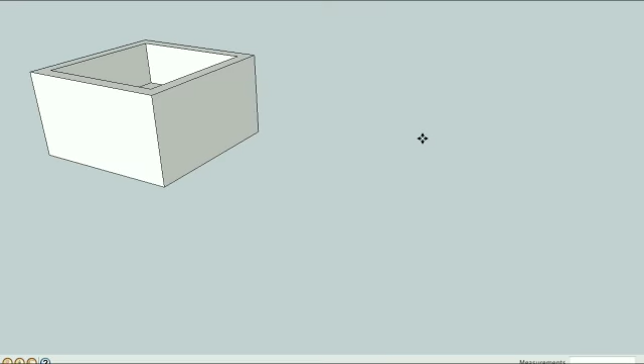So I've had a few requests to show some different joints, like a miter joint, half lap, dovetails. So I thought I'd take a tutorial here just to do a bunch of different joints. Let's see what we can do. We'll learn a new tool or two here as well.

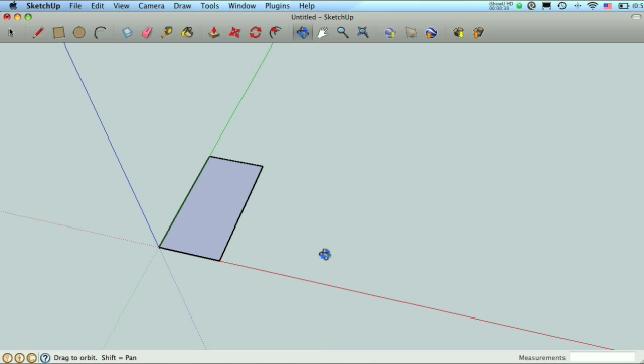So let's do a miter. It's a pretty simple one that a lot of people request. I'm going to draw a board here. We'll make it about 3 by 6, let's say. We'll pull it up to 3/4 inch thick, and then we'll group it.

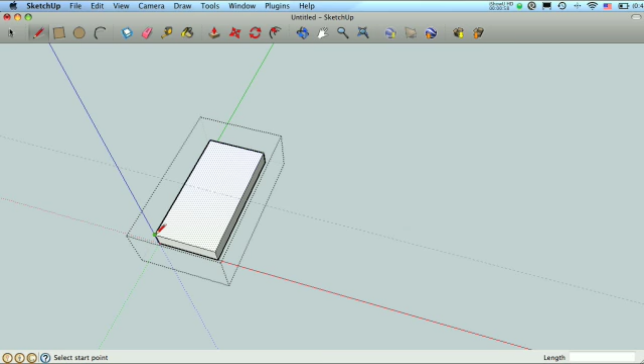Alright, so we know that when we do a miter, it's going to go from corner to corner in a square, right? So each side will be 3 inches. So we're going to do a guide here, and we'll do a point in 3 inches. And then what we'll do here is take the pencil. First we'll go into our group so we can draw on this face. We'll take our pencil here, and go corner to corner. Then we'll pull all the way through there, and once you see that, you click, and it'll disappear. So there's our 45. We'll come back out, delete this guide.

Now we could just draw another board over here and do another 45 miter, but we might as well just copy this board, right? We already have it almost ready to go. So let's do our copy.

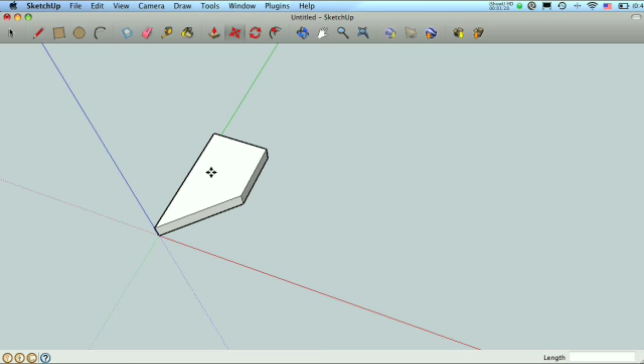Bring it over here. And then I'm going to flip it, get the two facing. So now the last step is we need to rotate it, right? It needs to be down here so it can plug in.

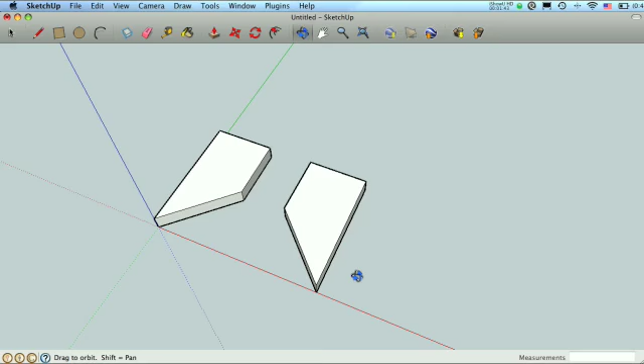And we haven't shown this tool yet, but we're going to use the rotate tool. Just this one right here. So the rotate tool is pretty interesting. Using this one, you can rotate on any axes.

So you see here, if we rotate it, we're going to be rotating around the blue axis, which is this one here. This is kind of confusing to think about how you're actually rotating around this axis, but the protractor here will change color depending on which axis it thinks it wants to go. There's the red, and you can get the green in here somewhere, if you're close, at the corner on the back, right there.

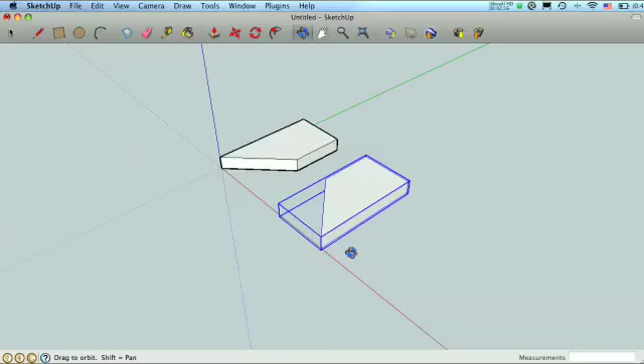So I'll do a couple examples, and I'll explain how this works in a second, but you'll see. So when we go here, rotate this way. If we were to get it on red, we're rotating this way. So we want blue in this case.

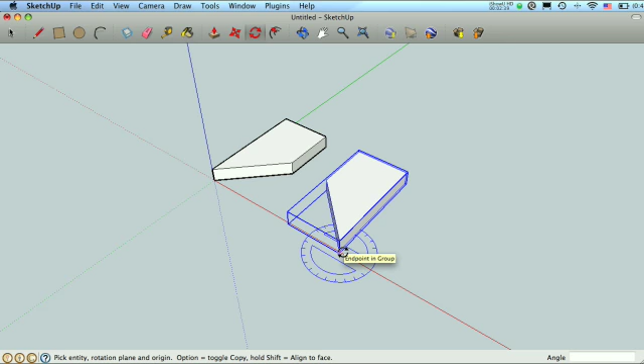So the way you do rotate is, your first point you click is the point you're going to rotate around. So we want to rotate around this point, click once. And then you give it sort of an area where you want to start rotating from. It doesn't really matter which of these points we pick, but I just pick a point that's straight out from where I started. So I'm going to go there, click, and now when you move the mouse, it wants to rotate. We'll get our hints. We're going to stay here on this axis. Click again. And now we're done.

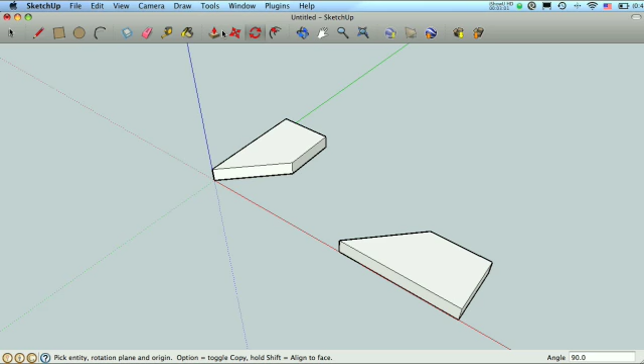So then we go back to move. We can move this right over here to this guy. There we go. So there's our miter.

So what if we wanted to do a half lap? Instead of redrawing all these pieces, I'm just going to undo back before I drew my miter. I'll keep that guide there though. So for a half lap, we're going to go in here.

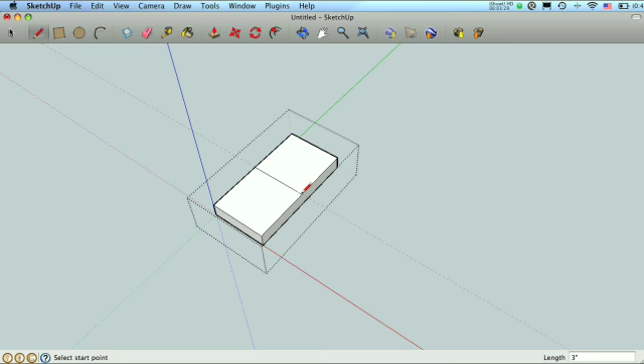We're just going to draw a pencil line right across. And we're going to pull down half the width of this, right? So this is 3/4, so we're going to come down 3/8. I'll type that in to make sure it's accurate. There we go. Come out here, get rid of this guide. Make a copy of this guy.

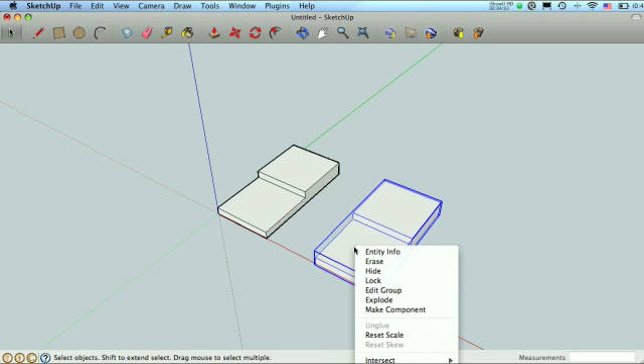Let's see, we'll see which of these flips works. Red does not. Green? Nope. These blue. There we go. So that's going to lap that way.

And then we'll use our rotate tool again. Let's say we want to rotate around this corner. Like that. And then we'll just move it into position.

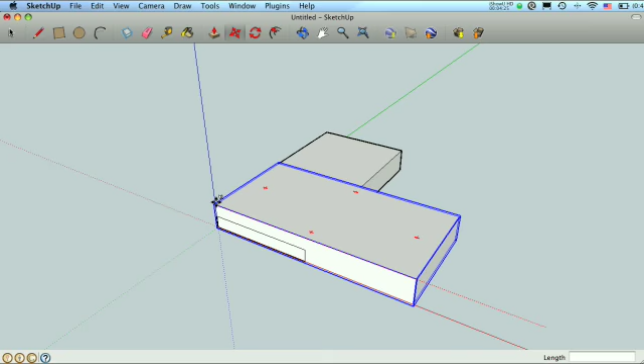We want to make sure that we're lined up there. So I'll move that again, this time grabbing it from one of the points I can reference. If I grab it from here, I can reference it to that point there, making sure they're lined up. There we go. So that's our half lap.

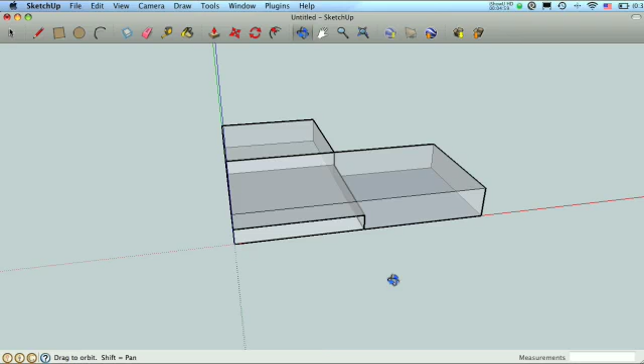Now it's a shame we build this beautiful drawing and then you can't really ever see it again. Well, there's a view that lets you see inside here. If we go up to View, Face Style, and go X-ray, it lets us see inside of our models and we get some hints. See, these lines are nice dark black because they're outside edges, but these ones are gray because they're inside. It's a neat way to see your joinery when you make it. And go back, just go Face Style, go X-ray, turn that back off.

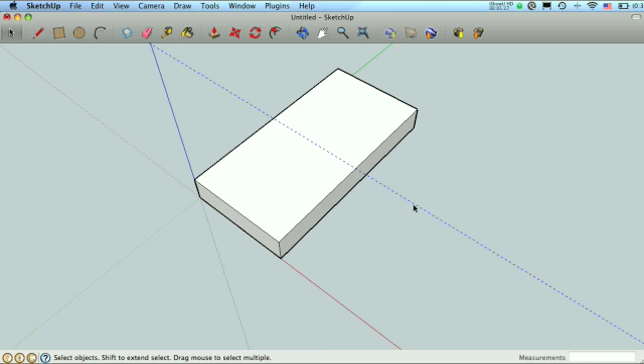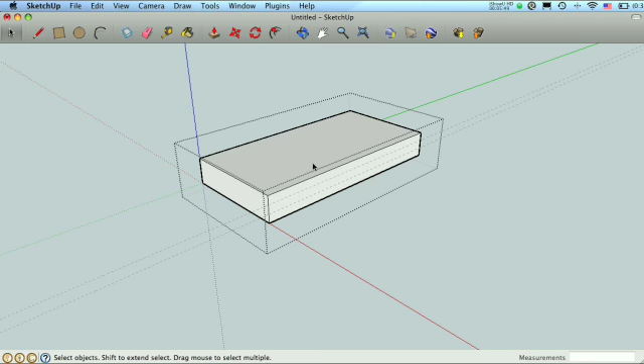Alright, let's try a tongue and groove. So what we'll do here is undo a few steps, go back. Actually I don't need this guide this time. So for the tongue and groove, we're going to come down the length. It's about a third of the width, so let's come down here a quarter, and then we'll come up a quarter. We'll use that as a reference now. We'll go inside here and take our rectangle, draw it right there, and then push pull in a quarter of an inch. So get it started in the direction you want to go, but then just type 1/4.

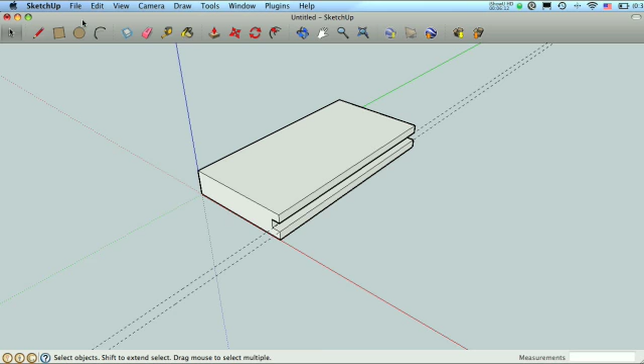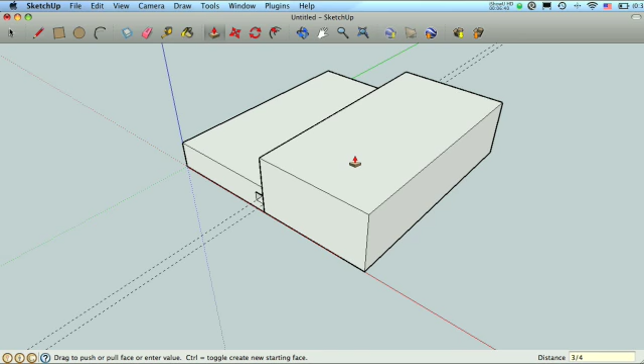So there's that. In this case I didn't duplicate this guy before I started, so I'll just draw a new one. And he was 3x6 - oops, wrong way - so we'll go 6x3. Come up 3/4. Group. Oops. Quarters. And we'll group them together.

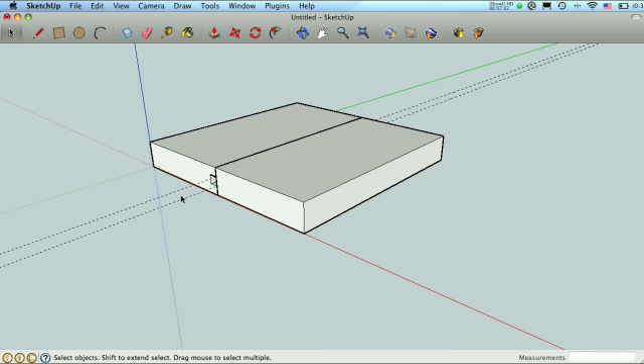And here's a neat little trick. These two guides we actually want - we can reuse these guides. But if we move this guy over here, it doesn't really do us any good because the guides are sort of stuck over here. So if we put him back, and hold shift and select with our arrow tool, you get the plus minus - if you click one thing and hold shift, you can select additional things. So we'll select this guide and this guide. You can see they turn blue. Then we'll go to our Move tool and actually move the guides with it. It just gives us some room to come over here and look.

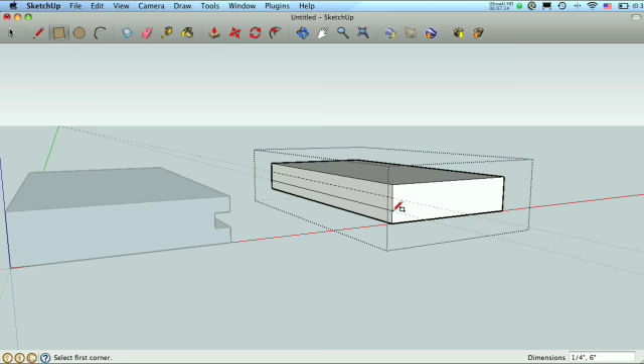So we're going to go inside, take our rectangle, try the same thing, but this time push and pull out a quarter. And we'll get rid of these guides and move him over here. There we go, there's our little tongue and groove. And if we want, we can look at the X-ray, see it running down the length there. Pretty neat.

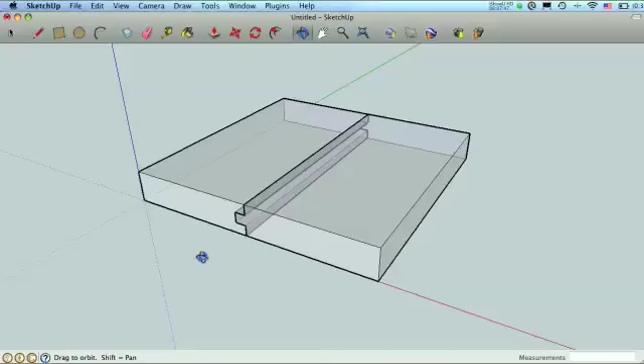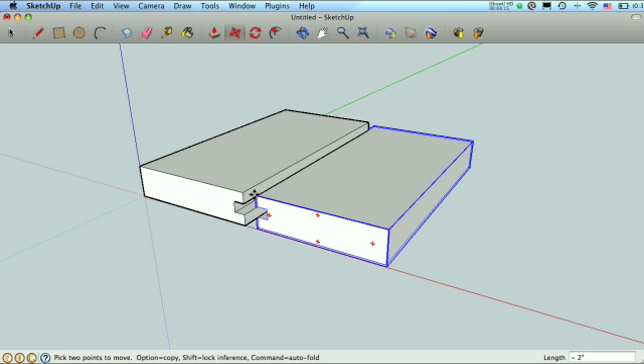So along the same lines, what if we wanted to do a spline in there instead of a tongue and groove? We'll get rid of this guy, and duplicate him because he already has a groove in him - press Alt there, duplicate. Then once again we'll do our flip along, we need to flip him over to face the other way. So let's try red, and red does it. I'm going to start by bringing him over here, back.

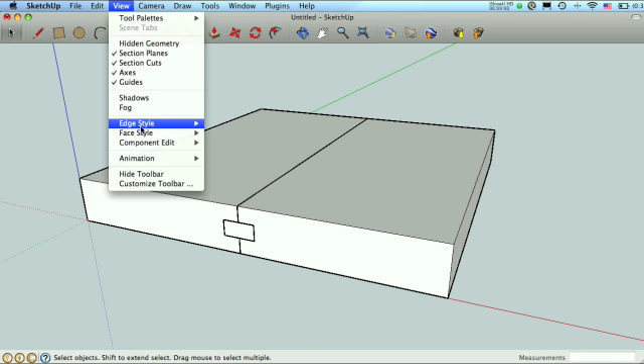We have a gap down the middle there, so we'll want to create a new face and push pull it all the way through to make our spline. I'll use this as the box to size my spline, so I'll make a rectangle here, and then move this guy temporarily out of the way. Come around, and then we'll push pull down here, and make a group. Turn back around and then move this guy over. There we go. Spline. If we take a look with our X-ray, it's kind of neat to see.

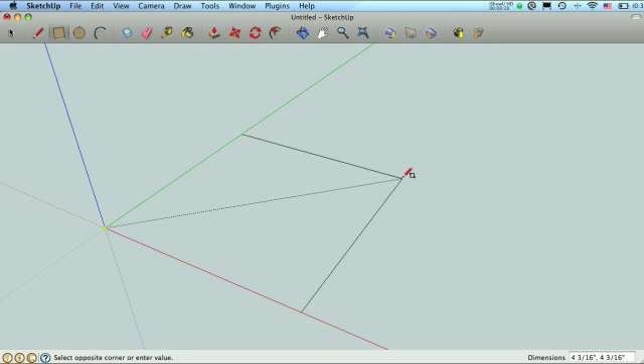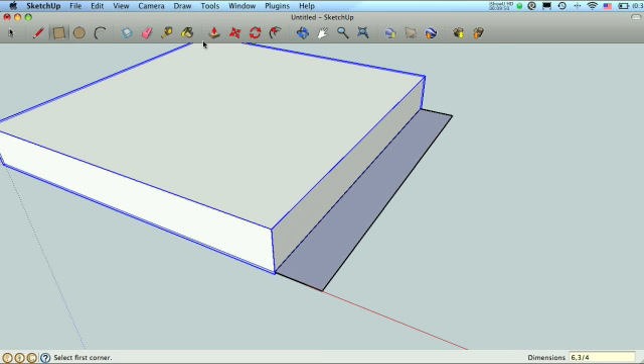Alright, turn that off. How about we do a little rabbet groove here? Let's delete all these guides. Let's start over here, make a little block, let's say 6x6 and 3/4 inch thick. And let's make his matching piece - let's group this guy first. Group. And we'll build his little matching guy over here. We'll pull him up 6 inches.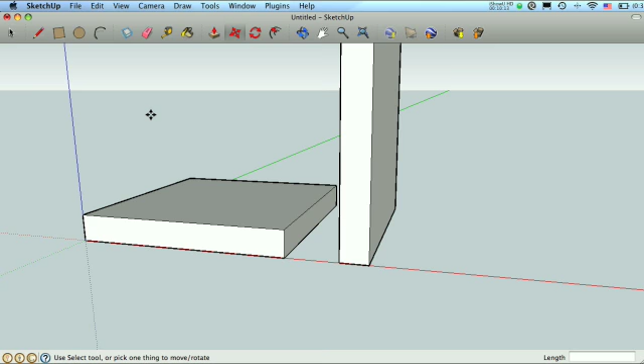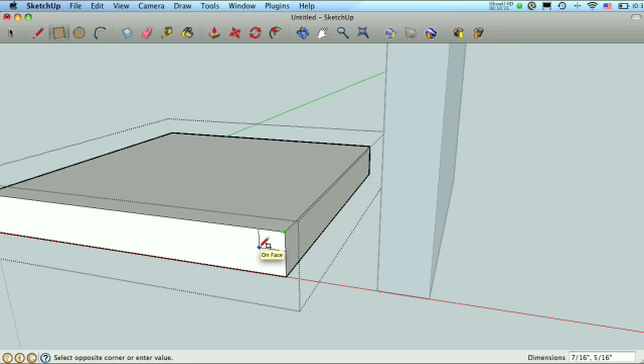So let's do our little rabbet here. Let's say we're going to take a half, so we'll just come across here. We'll go 3/8 by 3/8. Oops, so I forgot to go inside the group first. Gotta make sure we get inside of our group and then draw 3/8 by 3/8. And we can just push and pull this right through. And then we'll do the same thing on this guy, in this corner - 3/8 by 3/8. Push and pull.

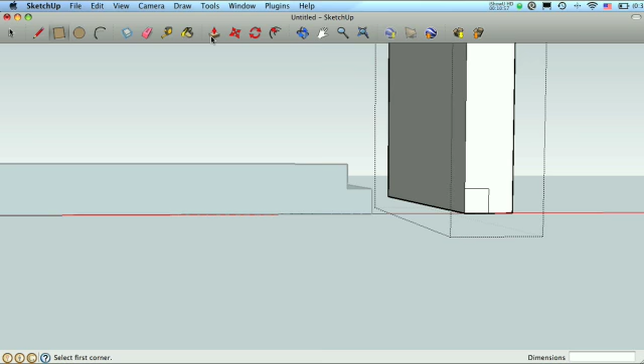There we go. Now we have a couple options, right? We can put him there, or we can put him up there if we wanted to, depending on what your usage is for that piece.

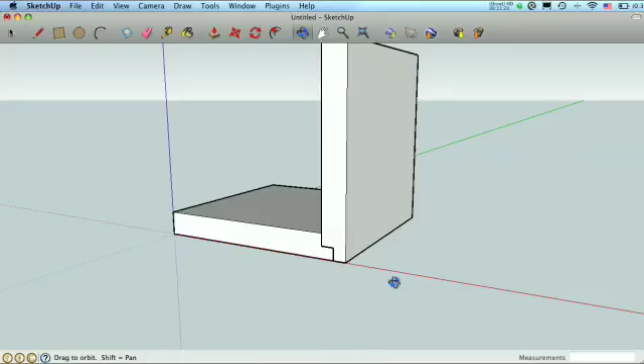Alright, so how about, we did a dado on our bookshelf, so how about a blind dado? One that's stopped on one face.

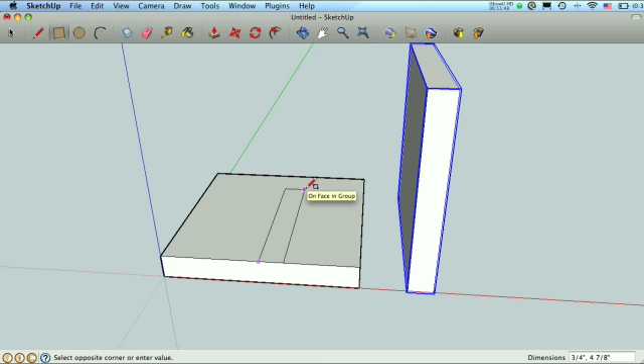Well, we're going to come in here, and it doesn't really matter where we start this, we'll just start from the midpoint to be easy. So instead of going all the way through like this, 3/4 by 6, let's say we go 3/4 by 5. I'll type that in, 3/4 by 5. Oops, and I forgot to go inside the group again. Make sure we're in there first. We'll go 3/4 by 5.

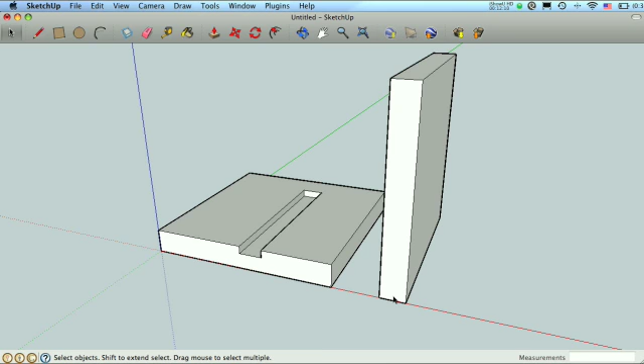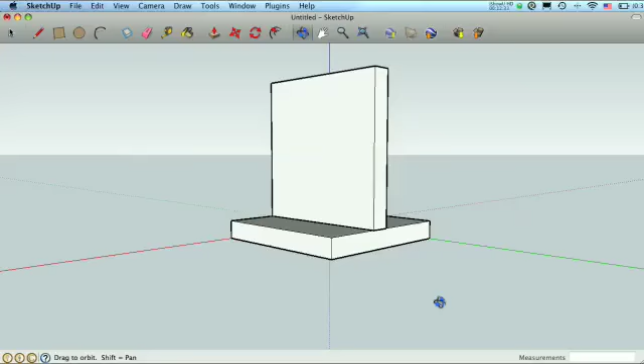And then we'll just push and pull down 1/4 of an inch. There's the stop there. And then on this guy, basically just do the same thing. Go right here and we'll draw 5 by 3/4, except now we'll pull him down 1/4 of an inch. And then we just move him into position right there. So from that side, it looks like we've got a butt joint, but we really know it's actually a dado. We can look and see with our x-ray down inside there and see where it stops. Pretty cool.

Alright, let's get a little more complex. How about a sliding dovetail? And for this one, let's turn x-ray off. Let's actually get this guy into position first, and we'll use one set of guides to kind of cut both these at the same time. So let's zoom in here.

Now, one way to do this would be to actually draw your guides at an angle, right? You could draw your guide and then actually use the rotate tool on them to get them to exactly the standard dovetail angles, 1 to 6, 1 to 8. But in my case, I just sort of use SketchUp as a reference. Like, I want to do a dovetail here, but I don't worry about getting the exact measurements for the angles. I'll do that when I'm actually in the shop cutting it.

So what I'll do to kind of approximate a 1 to 8 is I'll come in. Let's draw some guides that just define where our upper piece is. And let's come in, what is this at, 2 1/4, so let's come in an 1/8. And then we'll come back here an 1/8. And then let's go another 1/8. This will make sense in a minute here. Another 1/8. So for our dovetail, like I said, I just kind of use the guides as an approximation.

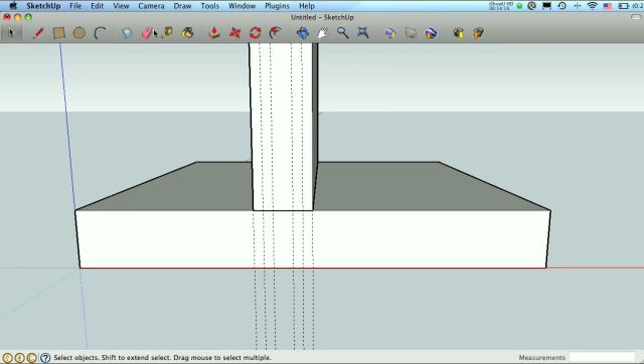Of the angle. Let me do one more, because we don't actually want this to go all the way through the board. Let's have it go in. Let's go up 1/4. And we'll have this go up 1/2.

Okay, let's go into this guy. So like I said, I choose these guides as sort of an approximation. So I'll go here, here, here, here. Right, looks like a little dovetail there. It's approximately maybe 1 to 8 or so. And then what we do is we just push-pull this guy all the way through.

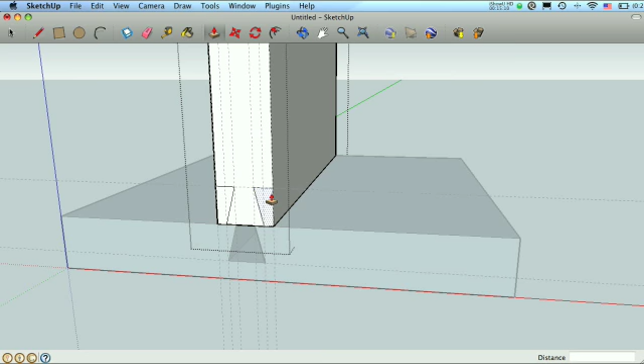All the way through there. Then we come back to this guy, and we grab our pencil. And we need him, we actually have to cut out, right? He's going to be the tail, so we're going to cut out this part. So we're going to come here, here, and over. And then here, here, over. We'll push pull him through, and we'll push pull this guy through.

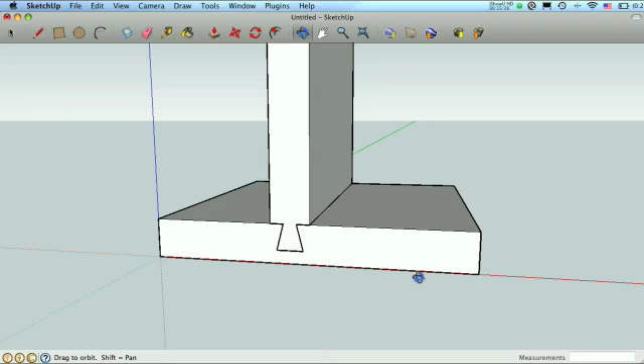Let's get rid of these guys, and get rid of these guys. And we can just move them. And of course, when we move it, we can just pull right through this model, but it's going to end right there. There we go, little slide dovetail. Of course, in reality, the slide dovetail has a bit of a taper, 1/64 of an inch or something like that, but I don't worry about trying to draw that with Sketchup. Just something I know in the shop I'll have to do. And if I look at this with the X-ray, you can see our neat dovetail down inside there. Pretty cool, huh?

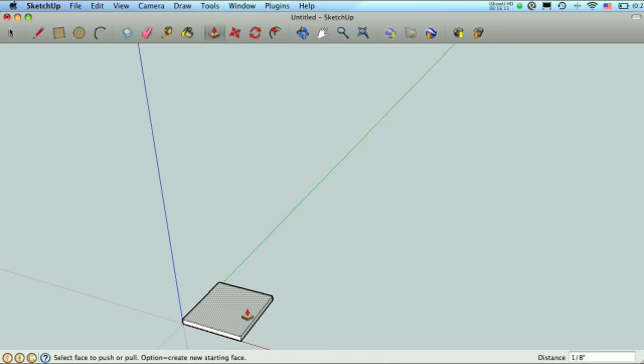Alright, how about let's do a mortise and tenon. Let's turn off our X-ray, delete these. Let's mortise and tenon say a couple posts together. So we'll make this 1.5 by 1.5. And let's say 6 inches high, maybe. Oops. 6. And we'll group.

Let's draw some guides here. We'll have our mortise be about 1/3 of the width. So we made this 1.5, so we'll come in 1/2 inch here, and 1/2 inch from this side.

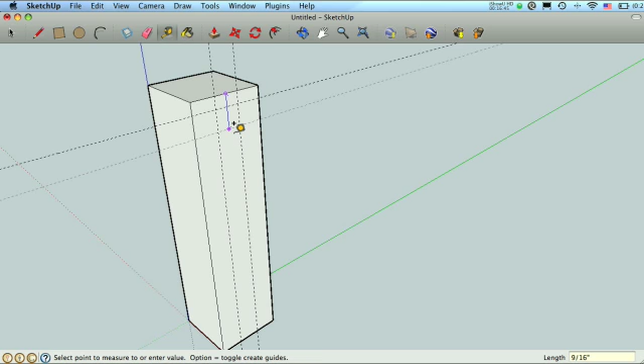And we'll come down 1/4. And we know our rail that's going to go across here is also going to be 1.5, so we're going to go 1.5 minus 1/4, so 1.25 there. That kind of defines our opening for our mortise, so we'll bring up our rectangle and draw him there.

Let's say we're going to make him 1 inch deep, so I'll start push pulling, go 1, enter. 1, enter.

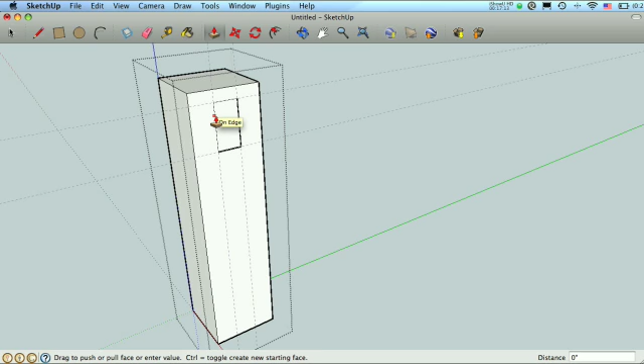And then we'll come on here and draw the rail, right off this face. We know he's going to be 1.5 by 1.5. And then we're going to push pull out to 6. And we're going to group.

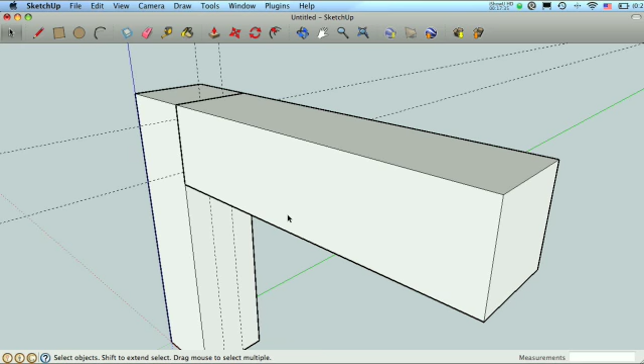And we're going to get that same trick as before, because we actually want these same guides. So once we have him selected, we're going to hold shift, get this guide, this one, and this one, and then move them all at the same time. We got to move over here so we can see what we're doing.

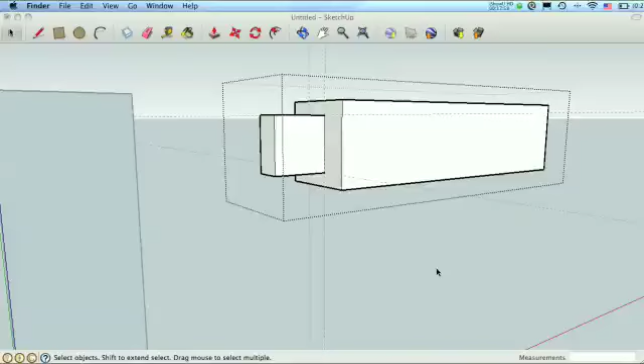And go into here and draw another rectangle, and we're going to push pull out 1 inch. There we go, there's our tenon.

So now let's delete these guides, and we'll just grab a reference point like this corner and match them up with this corner. There we go. And once again, we'll go to our X-ray, look inside there and see. Look at that. Sort of a mortise and tenon there.

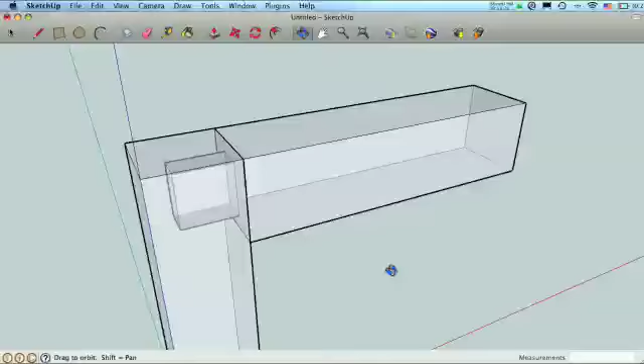All right, so how about the big one? Let's do some dovetails. Dovetails are going to rely a lot on that, the one I did for the sliding dovetail, where I did about 6 guides. We'll sort of do the same thing here.

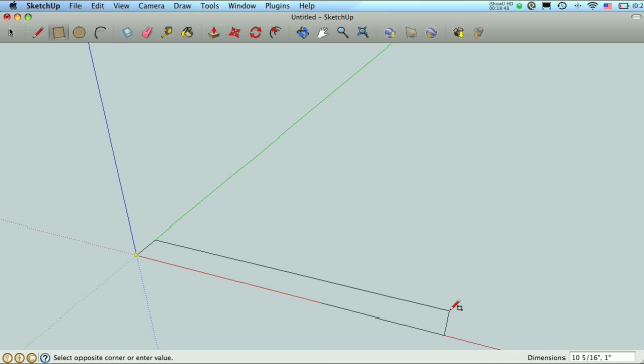So let's say we'll bring this, let's make a board, 3/4 by, let's say, let's do 6 by 3/4. And we'll make him 4 inches tall.

And we'll group, and I'll do a copy and a rotate here. You know how to move, you can press Option on the Mac or Control on Windows to copy. You can do the same thing with the rotate tool.

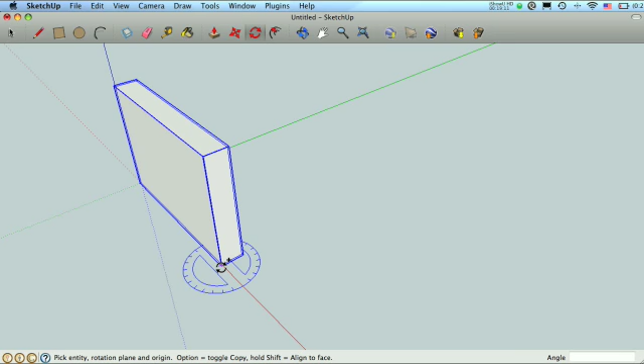So if I press that there, I'll get a plus, so I'm going to pick my starting point, pick my ending point, and then when I rotate, make a copy of it. Like that.

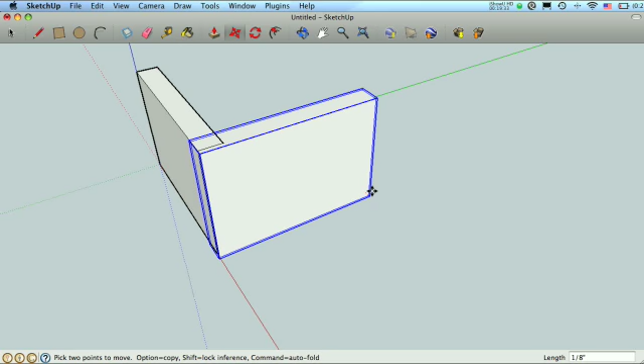So when this is all said and done, I'm going to combine these like this. So I'm going to put him where I want him to be when he's done, and then I'm going to slide him back. Let's get him out of the way there. Around there. And he's actually going to have the tails.

So I'm going to look at it like this, let's say. So I'll start with my guides here. And let's say I'll have the highest. Let's start at 1/4, and then I'll come down 1/4 plus 1/8.

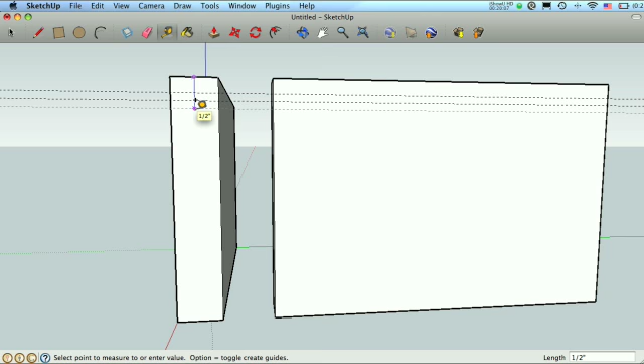And then I'll leave a little bit of a gap between there, so I'll leave an eighth and another eighth. So maybe 3/8 between them, and then come down one more eighth like that.

Okay, and then just like we can copy our model pieces, we can copy our guides too. So let's copy this guide, bring him down here, and I should have measured this up so that these are even, but just to be quick here, I'll just copy like this.

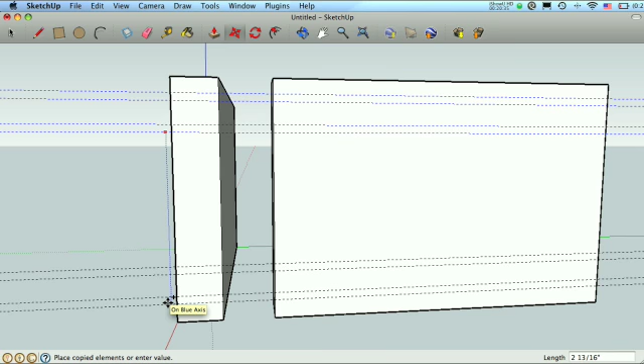Copy, and I'll go /2 to make 2 copies of that, and then I'll put one in the center there for me as well. So notice it's giving me the guides here for the pins and the guides here for the tails at the same time.

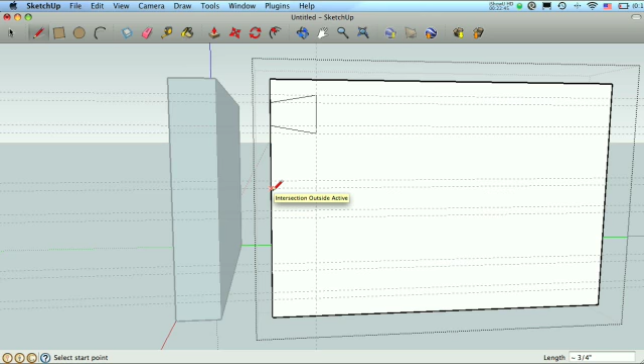Let's actually come here and we'll cut our tails first. I'm going to come up in this, and up here, that, and then we're going to pull these through.

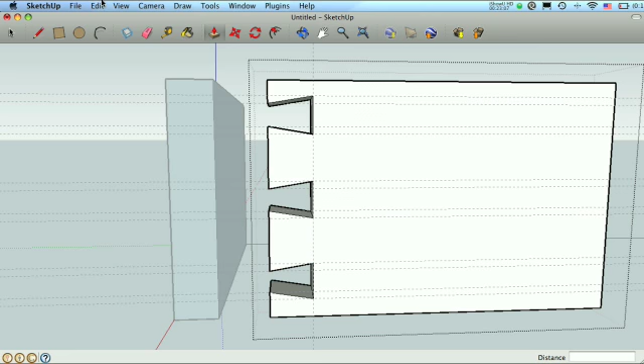There's our tails. And then we're going to go into this guy, into our pins, and we need to do the opposite, right? So we need to come up here. Well, actually, you're sort of doing the same angle, so you're going from low to high. So we get the same thing here.

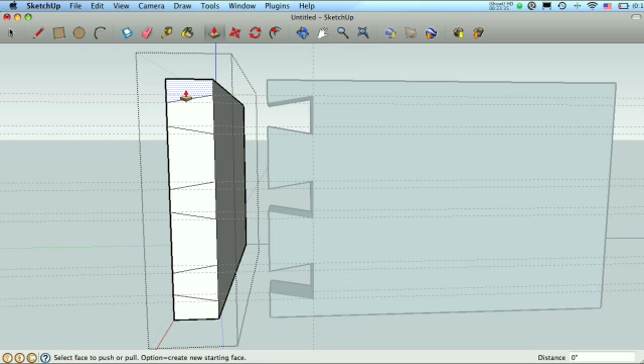And then we need to push and pull where the pins, or where the tails would be, or where the solid parts are here. We need to push and pull those out. So we're going to come in here: 3/4, and 3/4, 3/4, 3/4.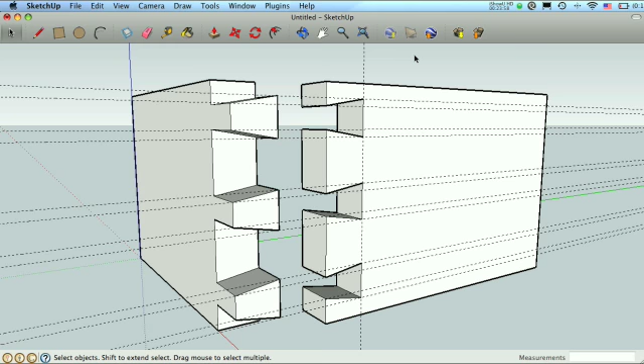That's right. And then we're going to move this guy in place. I'll pick a point we can reference, like right here. There we go. Get rid of those guides. And we'll look in X-ray and take a look.

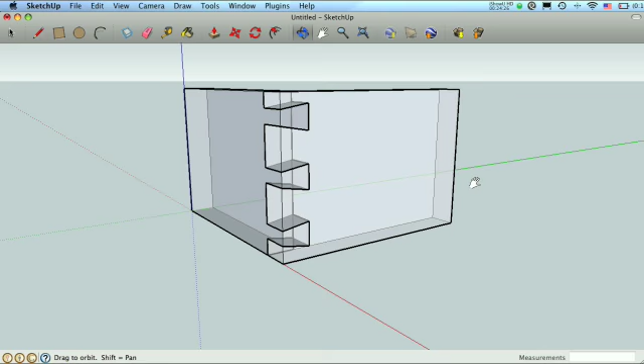Yeah, looks pretty good. So there we go, some common joints with SketchUp. And if I missed any important ones, someone let me know, and I'll do another addendum with that one as well.